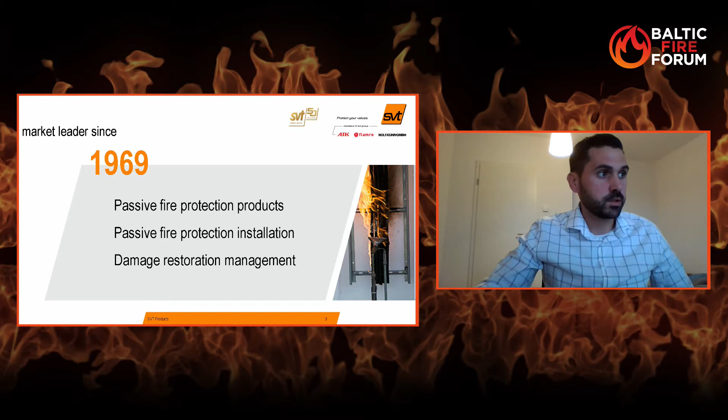Just a small overview, a few facts and figures. Founding year, as I told you, was 1969. Staff size is already over 800. Turnover is about 180 million a year. We have locations, over 30 locations in Germany and 4 production sites.

The scope of activities, as I already told you, we are the passive structural fire protection in the construction area, but we also have fire protection for industrial applications like I do, and the area of damage restoration.

So now here are the partners from us, and our headquarters is in Hamburg, Germany. Also, as I told you, our 4 production sites are all in Germany. We got a partner in SVT in Poland, also in Turkey, Russia. We have an office in the Middle East and Asia Pacific, and we have over 50 representatives all over the world.

Here are our market segments in the industrial sector. As I told you, we have the construction area, energy, rolling stock and aviation - that's my part as the battery safety part, so I'm the product manager of these 3 topics. But we also have ships and offshore, renewable energies, and special requirements. So we've got a whole bunch of business units for the industrial sector.

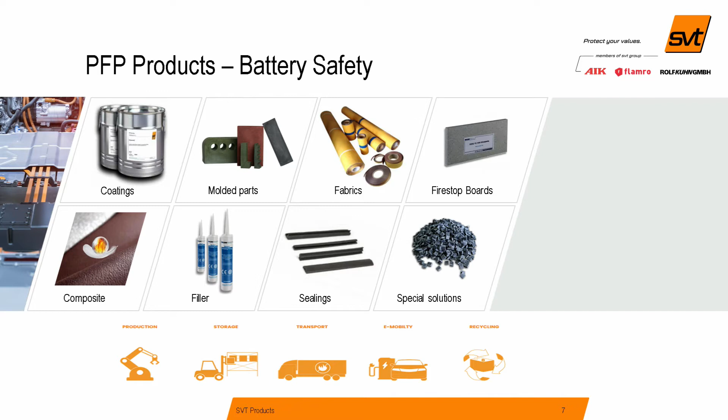The products that we use - we have some different kinds of products. We have coatings, molded parts, some PU-based materials, a lot of fabrics, fire stop boards, composite material, filler sealings, and some special solutions. Later on I will tell you a little bit more about our products and solutions.

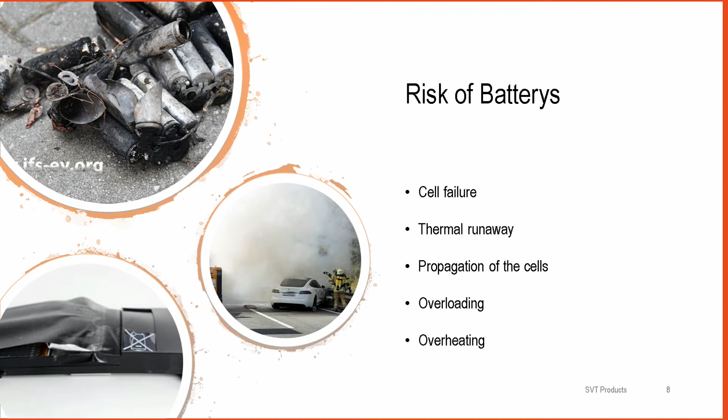Right now I want to start with the risk of batteries. As you can see in the pictures, everyone knows the risk of batteries. There's the Tesla, that's the most famous picture, I guess. But you can see some battery cells that react, and the most risk is a cell failure. You get thermal runaway. When you get thermal runaway, you get the propagation of the cells. And this is happening because of a cell failure, overloading or overheating from the battery system.

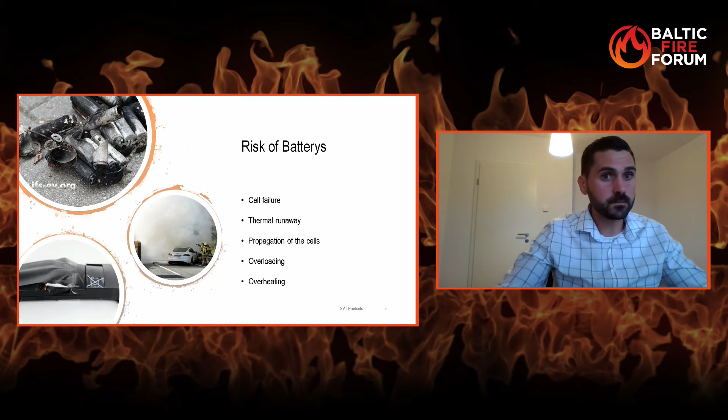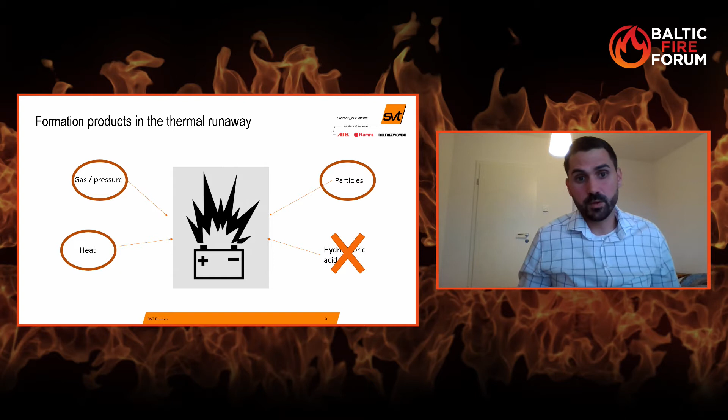Yeah, the formation products in thermal runaway - what happens when a thermal runaway in the battery cell is happening? So we get all kinds of happenings: we get the gas and the pressure, we get the heat, we get the particles, and we get the acids. Our products can be successful against 3 types of these 4. We can handle the gas and pressure, the heat, the particles, but what we can't do is the acid - we can't fight the acid. So we basically use these 3 kinds of formation products to protect with our materials.

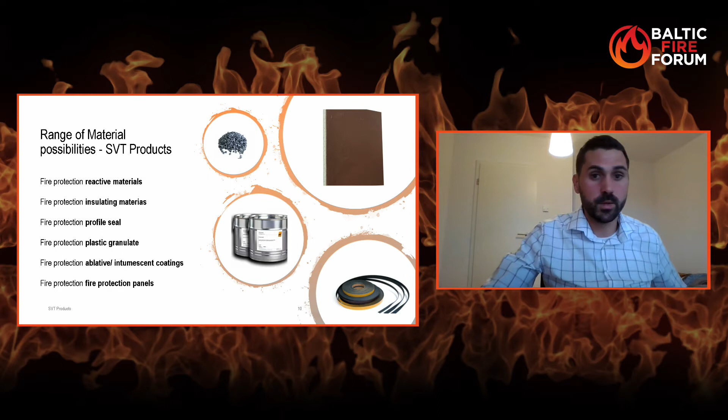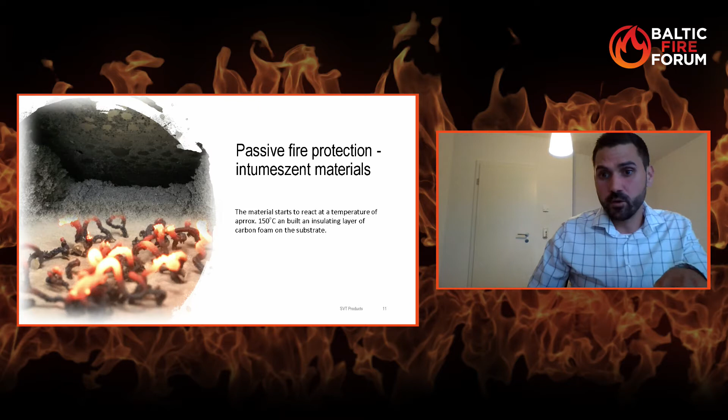You got a high climatic resistance from this material. It's water resistant and has already some sound reducing properties that you can use. But in the case of the battery, you don't have this much sound, so you don't need this very much. You also have short drying times and process times. That's of course really important for the big customers, the big OEMs, for example, the automotive guys.

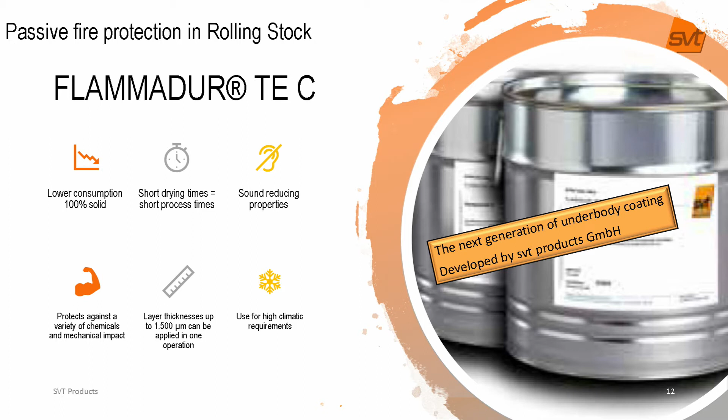So as I told you before, we got some intumescent coatings or intumescent materials, but we also have some cooling materials. This coating is a cooling material, so it's ablative, it's endothermic. You can use it to cool down the substrate. It reacts at a temperature of approximately 200 degrees and has bonded water inside, and releases this bonded water and cools down the system or the construction. So it's one of our oldest materials. It's over 20 years now in charge, and yeah, it's really good for cooling down the substrates.

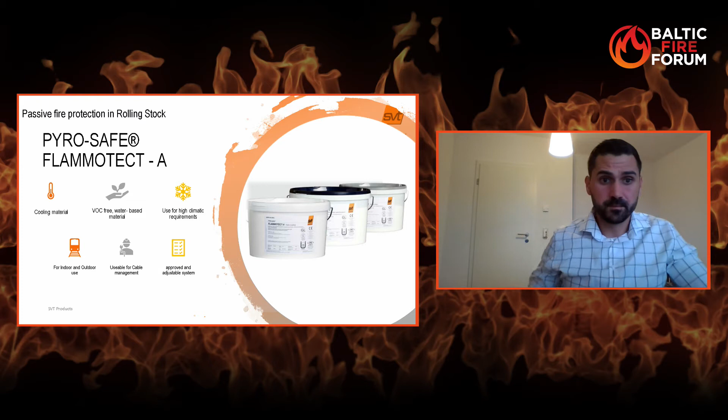Now we go to the topic of fabrics. We also have a lot of fabrics that we can use for different kinds of requirements. So I tell you this all very generally, because there are so many different kinds of requirements that we have for the battery cell inside, or for the system, or for the storage, or for the transport, that we don't have this one solution.

We can use everything. So maybe we can use a fabric for cooling down, or for protecting the whole construction, like a cabinet, for example. You can put it inside, and if the cells react, you can cool down the construction, and the intumescent foam builds an insulating layer.

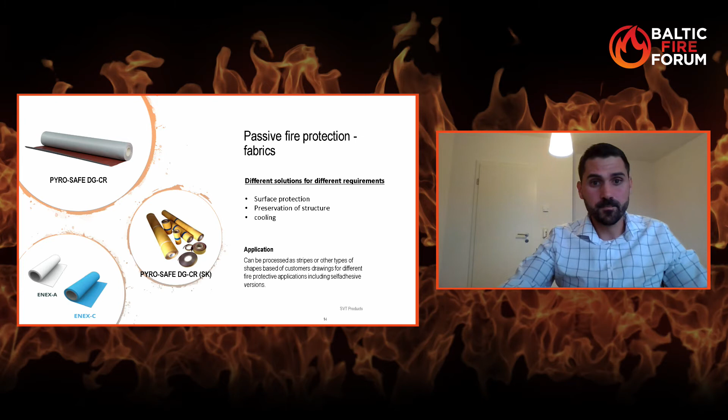Also, you can combine these two materials. So as you can see here on the picture, you got the blue one, that's the cooling material, and you got the red one, the intumescent material. If you combine these two together, you can see in the table, you can get so much energy from the fire and cool down the whole structure. You got a minimal thickness of 1.7 millimeters, or a maximum thickness of 4.5 millimeters.

And as you can see, you can achieve up to EI90 in a construction, but you don't really need 90 minutes in the case of a battery fire. And you have 3 times more bonded water than a comparable plasterboard. So you're thinner and you are lighter. And the construction, the lightweight, is the main focus for us.

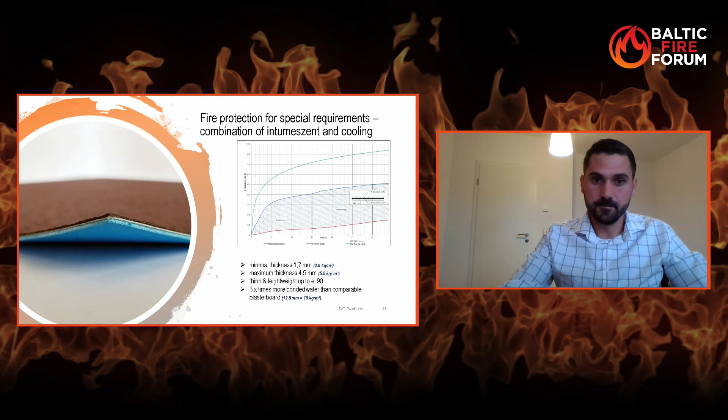Here are some other products that we can use. For example, that's a PU-based foam, or a PU-based casting system. The casting system you can use, for example, for cable management. And the foam: we got some projects right now where we cut it by water jet. We have a water jet cutting machine in one of our production sites, and we can cut these kinds of materials perfectly in the form of the cells.

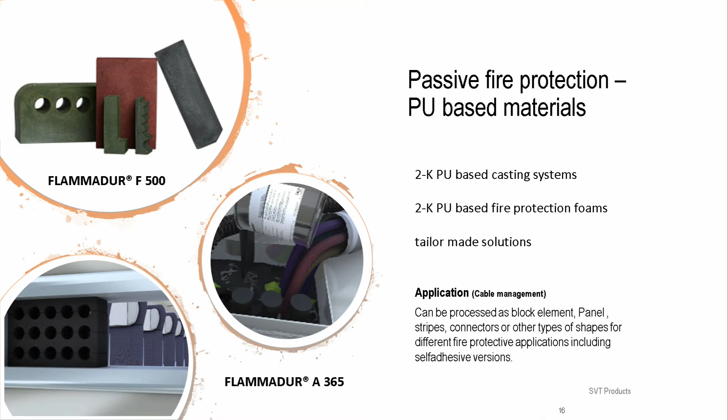So you can cover the cells with this foam, for example, and if you got a thermal runaway, the foam, which is also an intumescent material, is between the cells and stops the propagation from one cell to another cell.

As I told you before, we call it the special solutions. So we got some fire protection granulate, and with this granulate, it's possible to produce 3D printed components with fire protection requirements, and some injection molded parts, as you can see on the picture below on the left side. So this granulate is 100% intumescent material.

So if you got the special construction, the special form of your component that has to be fire retardant or have fire protection requirements, you can use this granulate for injection molding, or even print your own 3D part.

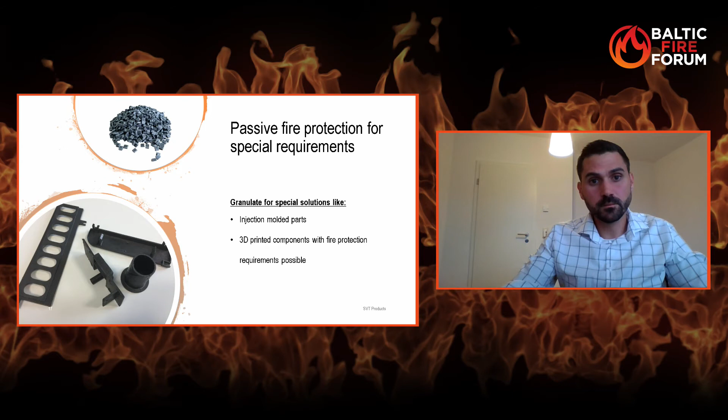Also, we have some sealings. It could be important and could be interesting for storage, for example. You have the sealing, which is very flexible. You can have it with different kinds of production. So you got the extrusion one, that's 100% graphite based, so intumescent.

Or you got the co-extrusion one. So one part is the intumescent material that builds the foam, and the other part is a normal used material for sealings, like PE or EPDM or something like that. Then you have a co-extrusion sealing.

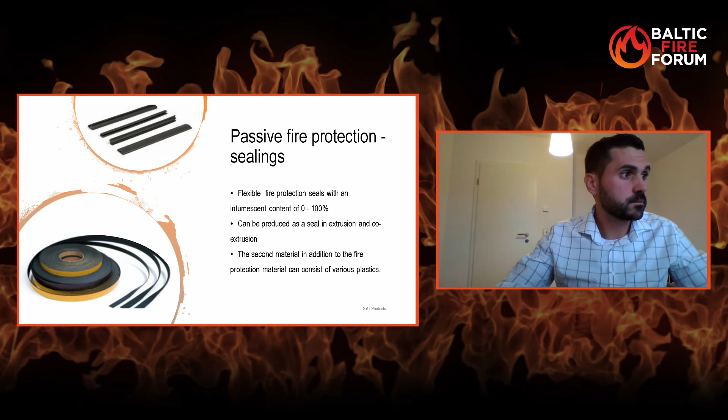We have some panels and some filler. For example, with these panels, you can build a partitioning between the cells. So, like I told you with the fire protection foam already, you can build a partitioning between the cells. If one cell, in an event of fire, got a thermal runaway, you can protect the other cells from the cell, but you also can use it for lining in boxes, for example.

We got some projects where we fill up some space in storage or transport boxes with these fire protection boards. And you can use it for the boxes when batteries already got the thermal runaway and have to be stored or transported from one point to another point.

Then if more cells in the box react, the fire doesn't come out. So you protect the whole box, for example, with these panels. Also, we got some filler material for sealings or stuff like that.

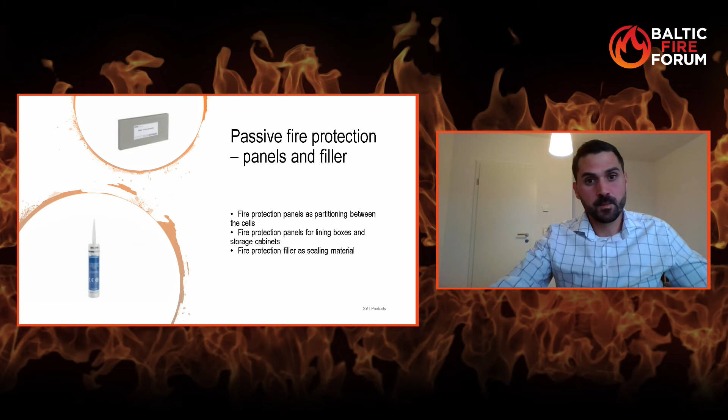Now, that's our main solution, I would say. It's our best solution, which we can use for every topic. And we got a lot of projects with this kind of solution, because as I already told you, the main focus is the lightweight. So we got a partner called Saertex. We developed a product together that's called Saertex LEO Coated. It's a composite material that we call the next level of fire protection.

We have the high impact protection. Later on, I show you some testing, what we are doing with our materials to test them, to evaluate them. We got a high impact protection like no material we had before. We can form it in every kind of part you need. And the most important thing, we got the weight savings.

For example, many customers or many OEMs in the automotive sector want to use aluminium because it's light, but the aluminium doesn't fulfill the fire protection requirements. Now we got a standard from China, I don't know if you already know it. The standard for automotive from China is you have to protect the battery system for about 5 minutes. In these 5 minutes, no flames should come out of the battery, of the whole construction of the battery.

So the aluminium has a melting point of about 500 degrees. If a cell reacts, we got temperatures of about 1200, 1300 degrees. So the aluminium is melting away. So the OEMs have to use steel because steel doesn't melt. But with this composite material, we can build a layer for the aluminium parts, and this kind of inlay protects the aluminium from melting. So the OEMs can build lighter with aluminium.

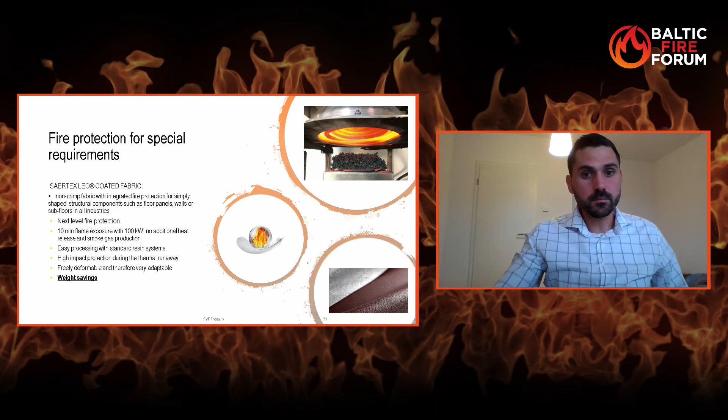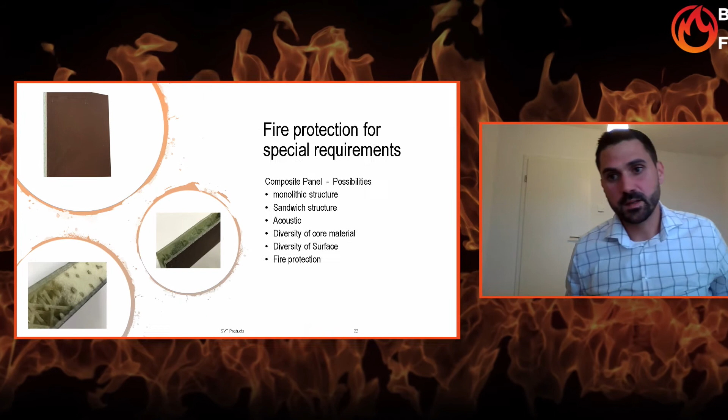There. So here you can see some pictures. As I already told you, we have some possibilities for this material. So we can build it in a monolithic structure. It's only the fiber with the fire protection coating, and then some epoxy resin, and you get a small, about 1 to 2.5 millimeters thick inlay that you can use.

But it's also possible to build the whole battery box or the whole transportation case, or everything you want to build you can build with this kind of material. You can use it as a sandwich panel. You have of course more benefits like the acoustic bond. Because of the foam, you can use some cork inside it for the acoustics. You can change the core material. You have different kinds of structures that you can build up.

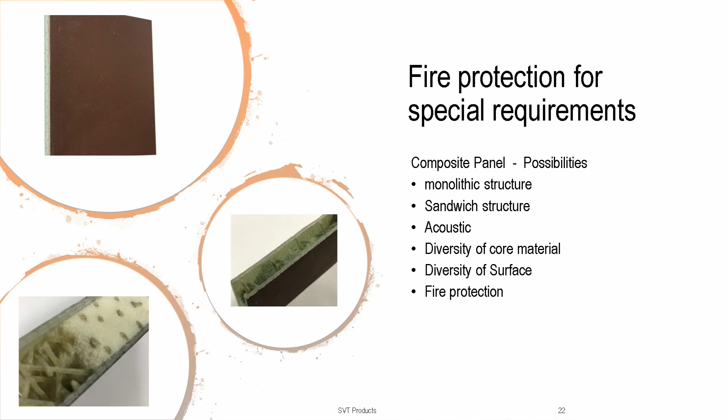And the most important thing, you have the fire protection. The fire protection is, as you can see on the picture above, the red layer on the fabric, and goes through the whole construction. So with this kind of material, we can withstand every test so far. And so for us, it's the best material right now because we can achieve all the fire protection goals, and more important, withstand the whole impact of the cell when it reacts and goes to thermal runaway.

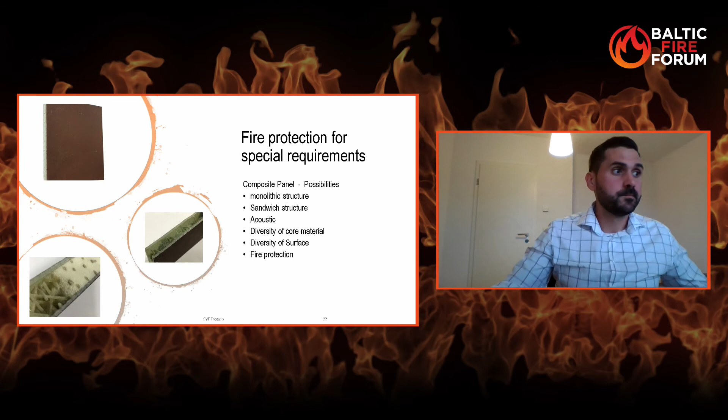Now it's, I guess, for you the most interesting part of this presentation, our research and development. We did a lot of research and development in our 4 R&D labs that we have in our company. Every product we produce by ourselves, so research and development is really big in our company, and we do a lot of testing, and we have tests available that we use to check the materials, to prove if they can withstand these high impacts.

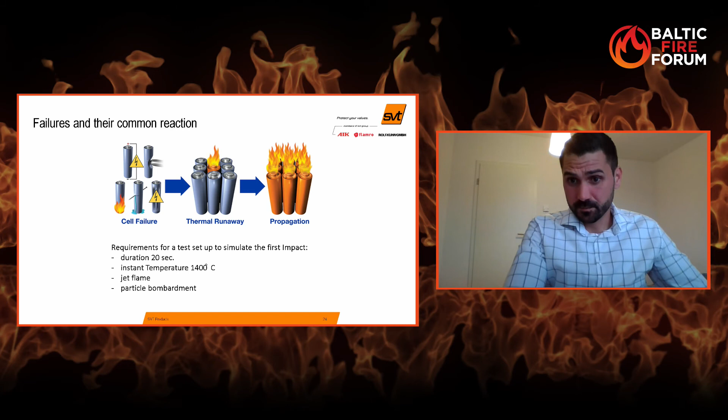You can see right now what we have to do for these tests, but what are the requirements for these tests? As we know from our customers and from some self-knowledge, we have requirements for a test setup. If a cell goes through thermal runaway, we get an explosion of about 20 seconds. 20 seconds is the range of time where the cell reacts. We get an instant temperature of 1400 degrees, like a jet flame with particle bombardment. So all the particles inside the battery come out through a small hole like a jet flame and penetrate the substrate. So these were the requirements for our test setup.

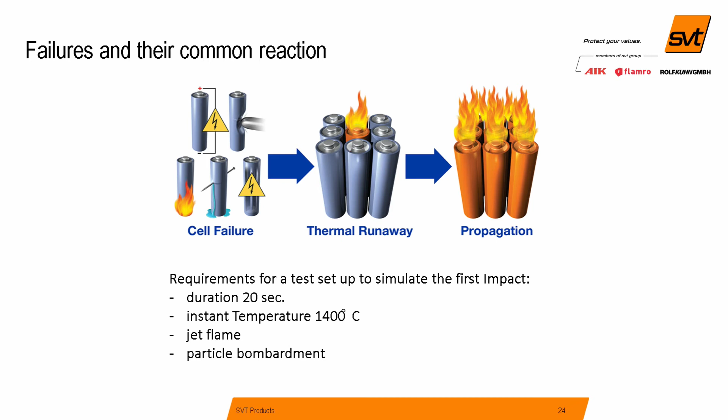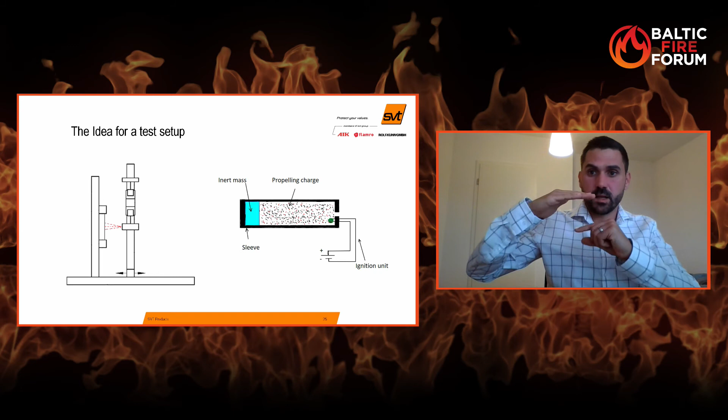So we simulate a battery system where the cover of the battery is about 20 millimeters above the cell. And then we let the cell react and go through the cover of the battery system, for example. But it doesn't have to be the cover of the battery system. It also can be a cabinet cover or something like that. But the test is really for us to show that our materials can withstand these requirements or don't withstand them.

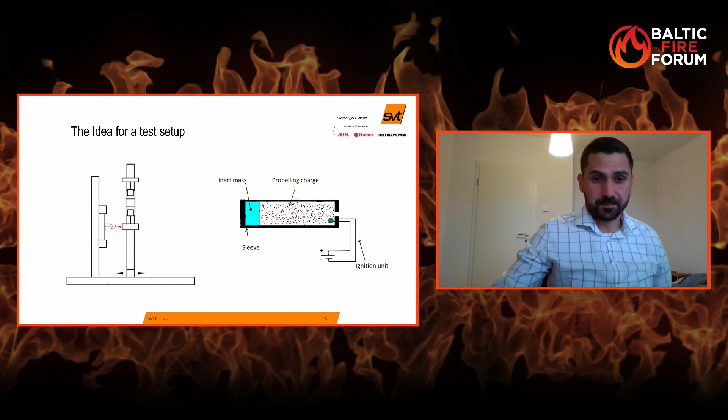We also tested about 50 or 60 different kinds of materials. I'll show you later on, and that's really impressive because it's a very simple and very fast test setup. Now our customers don't have to go through a large-scale fire test with the whole battery system, but they can test the materials before with us, and if they pass our test, they can go to the large-scale fire test, and hopefully they will pass it.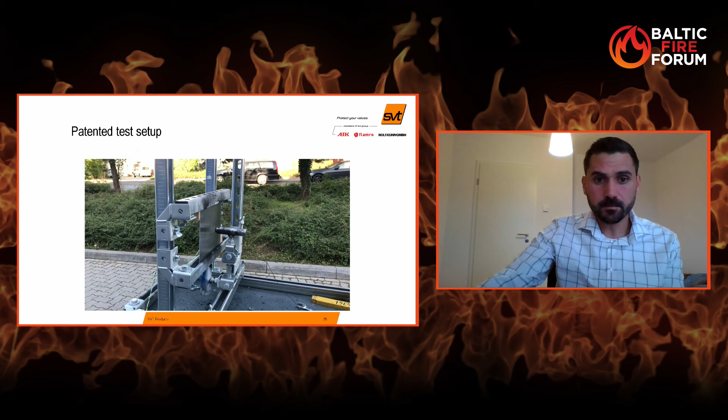We have tested this with some layer structures of our fabrics, of our coatings. We got the double layer ceramic fabric, as you can see the hole in the middle of the substrate, that protects the aluminum plate for about 6 or 7 seconds, and it's double layered ceramic. So as you can see, there is a lot of temperature, a lot of erosion. That's the really strong impact that the material has to be protected from.

And on the right side, you can see the material is Saertex LEO coated, as I already told you. That's about 3.5 millimeters, this plate, without aluminum, without any substrate, and the fire can't go through it, and it stops the impact for about 22 seconds. That's the time I already told you in which the battery reacts, and we can achieve this goal with this kind of material. And so that's the reason why we keep focus on this material in the area of battery safety, because we know it works.

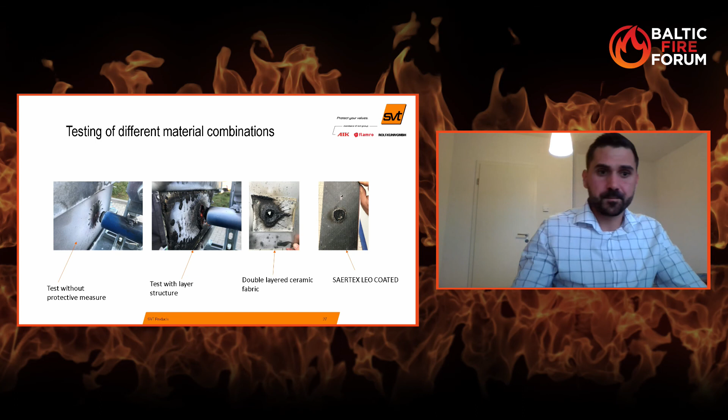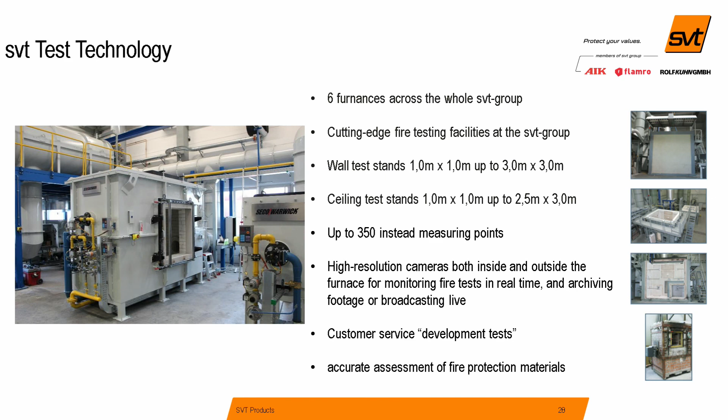But we got these furnaces to do some other orientated fire tests, for example for cabinets or storage and transport boxes. You can use the furnace to check the construction of the sidewalls, for example, if you achieve your fire protection goal of 30, 60, or 90 minutes. We have a large-scale fire test with an opening of 3 by 3 meters, where you can install up to 350 measuring points. For us, it's our customer service to do these development tests, as I told you.

Also with our patented battery solution, it's all customer orientated. We get the samples from our customers, test them for them, and tell them, okay, you can pass the test, or you won't pass the test, or it's okay, it's not okay.

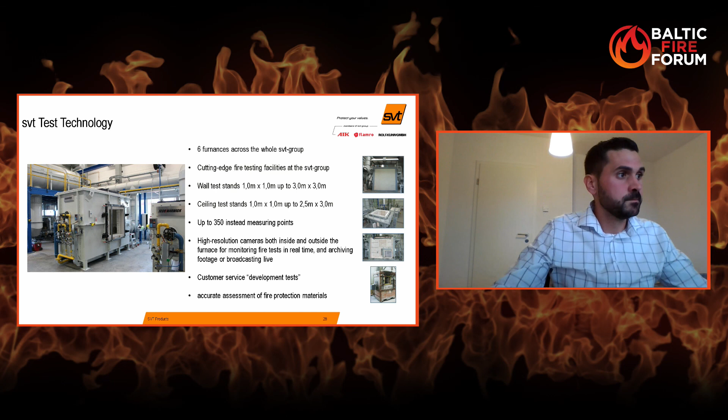We got our own R&D and in-house testing, of course, as I told you. We got some standard solutions, but most of what we do in this kind of business is the tailored solution. So we got this tailored to your needs. You got a requirement, you ask us for help, and we will check based on your requirements, okay, what can we do for you and your project to achieve your fire protection goals? That's our main reason. We got our own documentation system, of course, and that's the normal things.

But you should know, when you think about this presentation, we don't have this one solution. We have many solutions, and we got this tailor-made solution. So we go through your project, through your requirements, check, okay, what can we do for you, and put on some different kinds of solutions, then test them with you together, of course, to fix your fire protection problems.